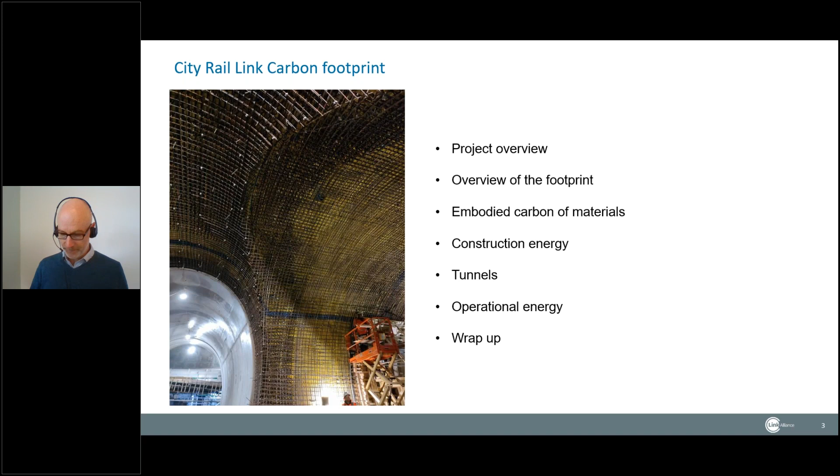This project, which was actually first proposed in the 1920s, so we've finally got around to building it. It'll be running about 100 years after it was first thought of. This project is to remove that dead end at Waitemata Station. All of this is overground rail, and it's an underground system right through the heart of the CBD, out to rejoin up with the Western Line.

It'll involve 2 new underground stations and significant redevelopment of the overground station at Maungawhau. The biggest impact it will have is that it basically doubles the capacity of the entire rail network. At the moment, all the trains have to come into Waitemata and then back out again. This will literally double the number of trains we can run, so it has a big impact on the whole network, increasing capacity equivalent to 16 lanes of motorway traffic going into the city without all the disruption that would entail.

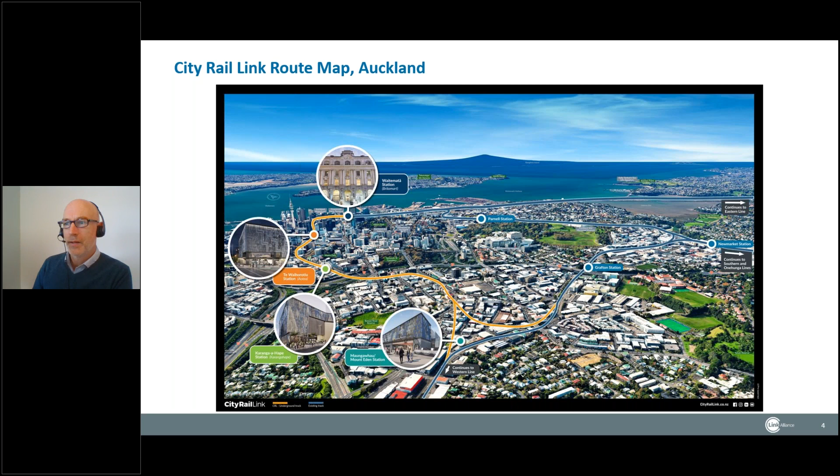So the physical build, starting at the top right here: Waitemata Station. There are some early works packages that have tunnelled underneath that station, which is an existing heritage building, using cut and cover tunnels up towards the first station, Te Waihorotiu Station. That will be the network's busiest station when it's open, a 15-metre deep cut and cover station.

From there, it's tunnel boring all the way up to Maungawhau. There are twin tunnels, 6.24 metre internal diameter. The first stop is at Karanga-a-Hape Station, a 33-metre deep mined station, then continuing on to Maungawhau Station, which is an above ground station. From there, there's a series of mined and cut and cover tunnels at the connection of this area, rising up to grade to join into the existing network. So quite significant works to join it all up.

That's the physical construction of it. The project is currently coming towards the end of the civil works, so that's mostly complete. The tunnels are all bored, and we're entering into a phase of architectural works and systems fit-outs and so on.

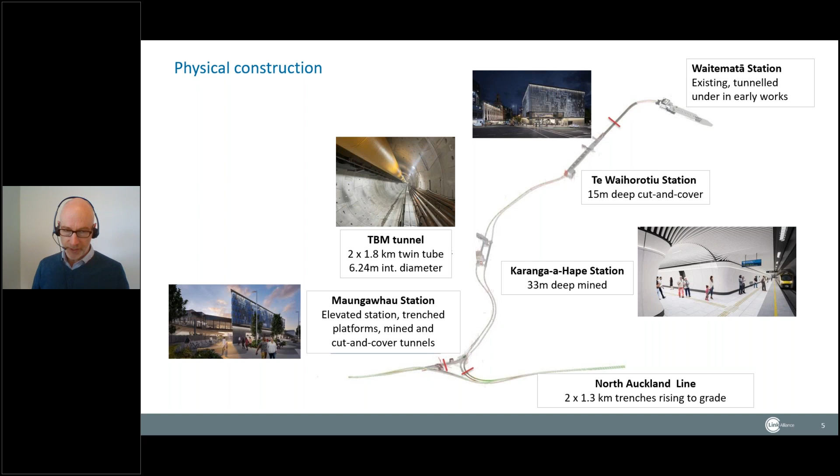It's a roughly $3.4 billion project, and the vast majority of that is delivered by the Link Alliance, this group of companies. City Rail Link Limited, which is actually my employer, is the client organisation. The design partners are AECOM, WSP, and Tonkin and Taylor, and the construction partners are Vinci, Soletanche Bachy and Downer. It's a 50-50 split between the New Zealand government—the rail assets will be owned by Kiwi Rail once completed—and Auckland Council, with assets owned by Auckland Transport when it's completed. So that's a 50-50 split in terms of funding.

The CRL carbon footprint considers construction and a projected 100 years of operation, so we've got a mandate to reduce the carbon footprint for both phases, construction and operation. As you can see from this pie chart, about half of the total footprint is the embodied carbon of the material, the carbon footprint related to manufacture and transportation of materials to actually build it.

Another 11% of the footprint is the energy used on site to build it, that's construction energy. The remaining 40% is the electricity used to operate the asset over its 100-year design life. Operational energy excludes traction power, so this is the energy used to run the stations and rail systems, but not the actual traction power of the trains.

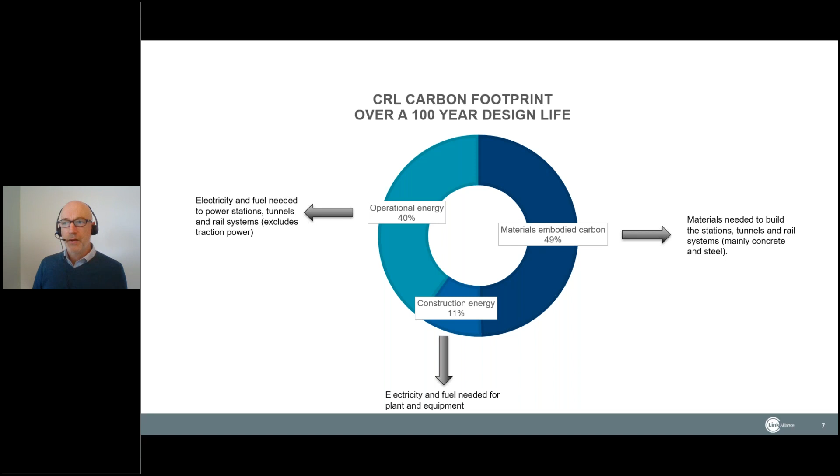I'll now hand over to Neil to talk about that first big chunk, the 50%, which is the materials carbon footprint.

Thanks, Nick. Hi everyone, I'm Neil, one of the sustainability advisors here on the City Rail Link project. If we focus a bit more on materials, we can easily see that concrete is the main source of our emissions, followed by reinforcing steel, structural steel, and cement.

To give you an idea, the carbon footprint of concrete is around 80,000 tons of CO2. This is roughly 185,000 cubic meters of concrete that's going to be poured, equivalent to about 40,000 trucks, just to give you an idea of the scale of the project.

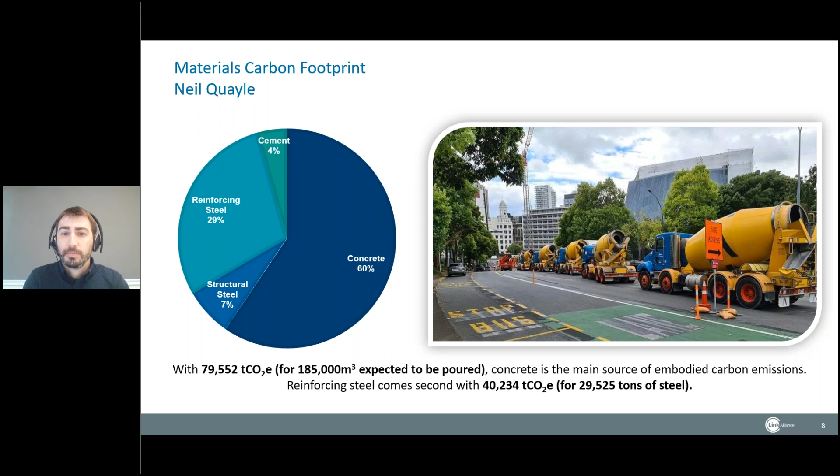So those calculations are mainly based on emission factors. We've displayed the main ones here on the chart. They come from the Infrastructure Sustainability Council, an independent rating tool based in Australia. The way to read this chart is if you take structural steel for example, on the left: to manufacture 1 ton of structural steel, we emit 2.9 tons of CO2.

So we talked about concrete, you can see here in blue in the center of the chart. What's interesting is that it's actually the cement content that drives the concrete emissions. One way to address that is to reduce the amount of cement in the concrete design. The standard 40 MPa concrete has a carbon footprint of 0.4 tons of CO2, but if you reduce its cement content, for example replacing it with fly ash, it decreases to 0.3 tons of CO2. We'll talk more about this in the slides afterwards.

The other interesting fact here is if you take timber, you've got two different values depending on the approach taken. Where you've got the negative value, it's considered as storing carbon and therefore removing some from the atmosphere. But if you take a whole of life approach, you also need to account for the disposal of the timber once you've used it on site, and therefore it has an impact and releases carbon.

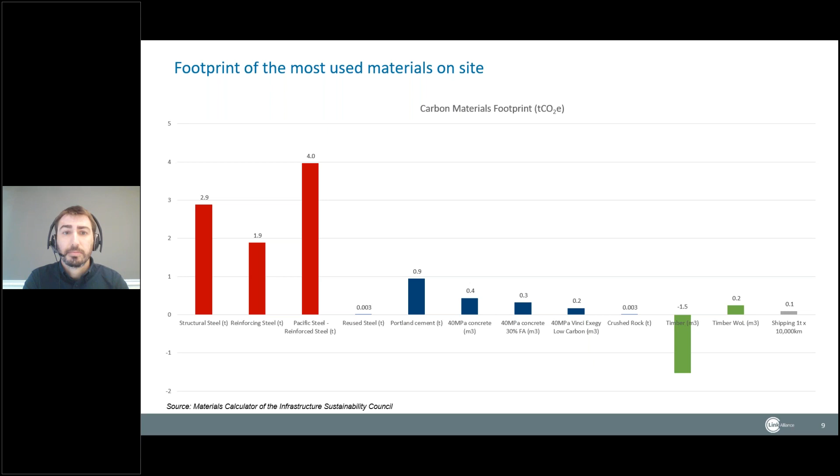So on a project of that scale, we've got different sustainability targets and KPIs. One of them is to reduce our carbon footprint by 15%. In order to do that, we need to establish a base case to have a point of comparison.

What we've done on the project is taken the reference design developed by the client. We've gone line by line, extracted the quantities, like you can see here for this particular capping beam, and then multiplied those quantities with the relevant emission factors that we just saw in the previous slide.

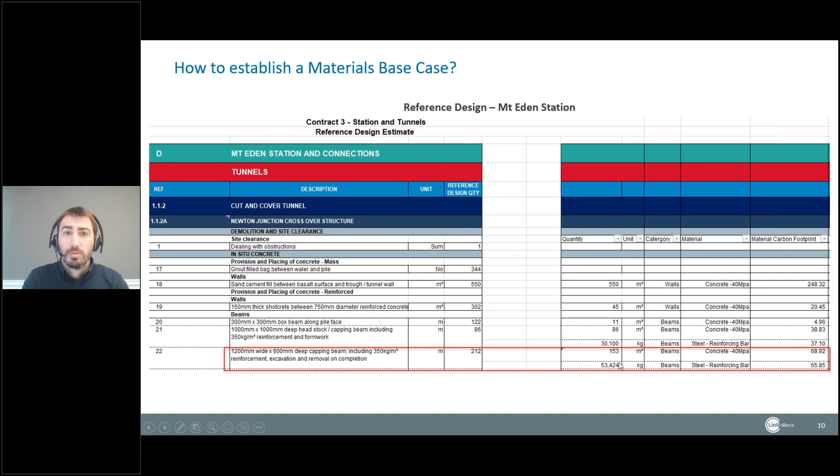Regarding design, it's a bit more complex. We first collaborated with the BIM team - BIM stands for Building Information Modeling. The team developed a 3D model of the stations and tunnels that needed to be built, and within this model they've quantified all the concrete and steel that will need to be used for the construction. Again, we've extracted those volumes and quantities and used them to create the detailed design carbon footprint.

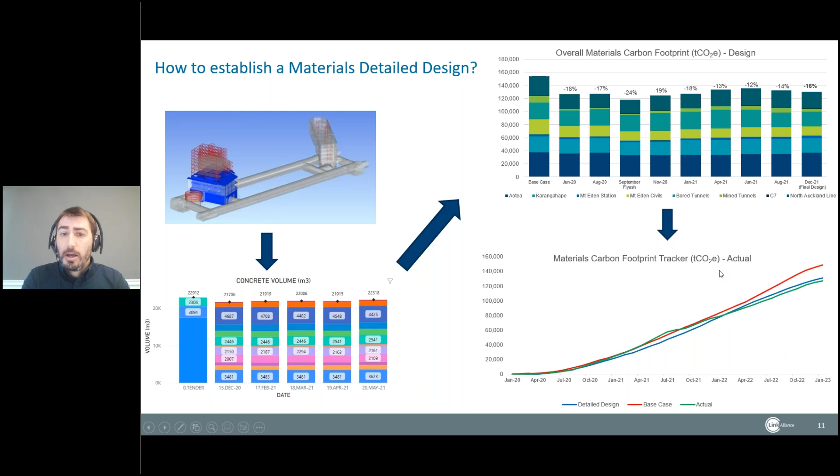Finally, the last chart uses those base case and design footprints to monitor and track against our actual footprint once construction started. The red line is our base case, the blue line is our detailed design, and the green line is our actual. You can see we're tracking at 15% below our base case, and this is due to a few different initiatives I'm going to talk about in the next slide.

So the one I've briefly mentioned is around concrete mix design. We expected an 18% reduction in our concrete footprint, mainly due to an average of 21% replacement of cement with fly ash. This might not seem like a lot if you're in another country, but here in New Zealand the current average cement replacement is only 2%. So it's quite a big jump that we have on the project.

The second one is around design optimization. As you can see on the bottom left corner, we've removed the central adit at one of our stations, which reduced the amount of tunneling required by 11%, and therefore reduced the amount of shotcrete, concrete, and reinforcing steel that was needed.

Changing in methodology, we've changed from bottom-up to top-down construction, which means we didn't need some of the temporary steel props you can see in the pictures. The only drawback was that we had to increase the thickness of some of the walls and slabs, offsetting a little of the benefits of these initiatives.

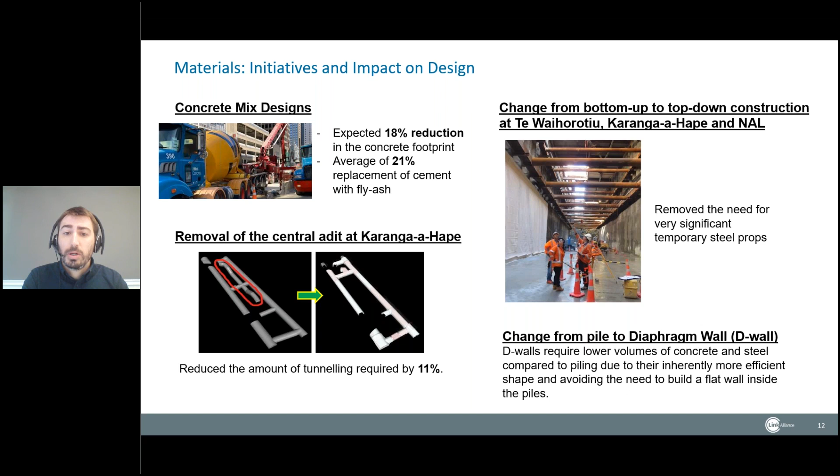And finally, we changed methodology for some of the works, from piling to D-wall. D-wall is a bit more efficient way to build some of the elements, requiring lower volumes of concrete and steel. This was a brief overview of the materials.

I'm now going to hand over back to Nick to talk about construction energy. Thank you very much.

Thanks, Neil. So as you saw from the original footprint, Neil's talked about 50% of our footprint. Construction energy is actually the smallest part, or that's kind of the most visible - you've got all those big machines on site churning out lots of diesel fumes. In fact, it's only 11% of the footprint.

So I'll talk quickly through how we calculated that. Neil mentioned that for the materials, we had a reference design with quite a detailed list of all the materials expected to be used in our baseline. The reference design doesn't have that same kind of detailed information around what will be used to construct it - that's not the sort of level of detail you get in a reference design.

So what we did in order to set a baseline we could compare ourselves against is we worked out, based on our detailed design, the constructors worked out what machines they're going to use and how long they're going to use them for, how much diesel they're going to use, etc. We also had a whole lot of initiatives that we implemented to try and reduce the carbon footprint of all of that.

So what we did is we looked at our footprint for our detailed design, worked out what the initiatives were expected to save, and used it to backcast to a baseline we can measure against. So a baseline is basically a detailed design without the initiatives we've added in - it's a design using business-as-usual technologies, with no focus on reducing the carbon footprint.

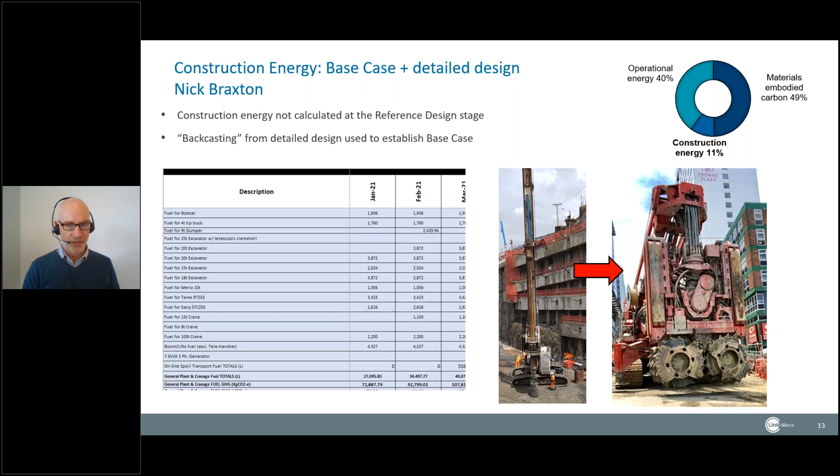For example, a lot of the original design had a lot of piling with secant and contiguous piles, etc. We replaced quite a lot of that work with diaphragm walls, so we worked out whether that saved us any on-site emissions, and put that into our savings. I'll talk through some of the details of where we got those savings.

We're expecting a 19% reduction in our construction emissions carbon footprint, which comes from 5 main areas. First, as I mentioned, we changed a lot of the piling methodology, from piles to D-walls, and made other changes to the piling approach, doing more detailed site investigations so we could optimize the piles we're using, changing from secant piles to contiguous piles in various areas - all sorts of different changes, even keeping an existing wall originally slated for demolition that we found we could reuse.

So a whole lot of things there have created quite big savings in piling, which is a very big part of the construction footprint. Another thing we've done is, where possible, we've tried to use grid electricity. New Zealand's grid is about 80 to 85% renewable energy, mainly from hydro, geothermal and wind. So anytime you switch from using a diesel powered machine to a grid connected machine, you get about an 80-85% saving in your carbon footprint. So that's the single biggest thing we can do.

A good example of that is these multi-service vehicles, used in the bored tunneling. They deliver the segments to the tunnel boring machine, and people and other equipment. We used electric MSVs - we actually had 5 MSVs, 2 were diesel, 3 were electric. The electric ones were battery electric with regenerative braking. The advantage of our project is that it's all downhill, so the MSVs are traveling downhill loaded and therefore recharging the battery, then go uphill empty.

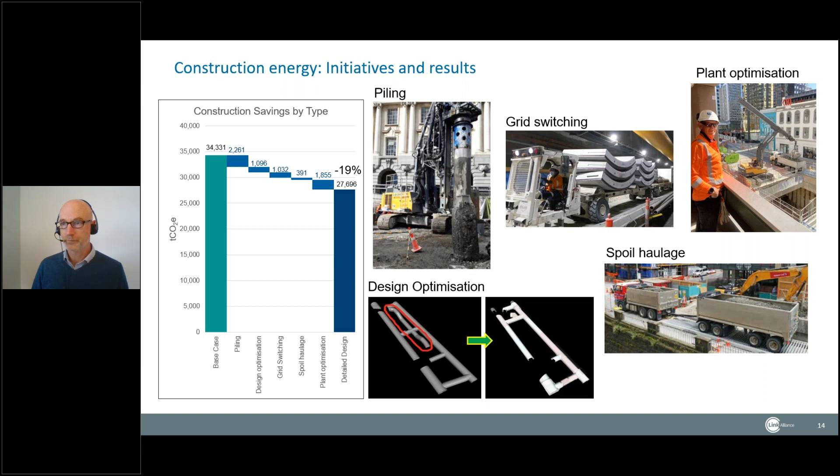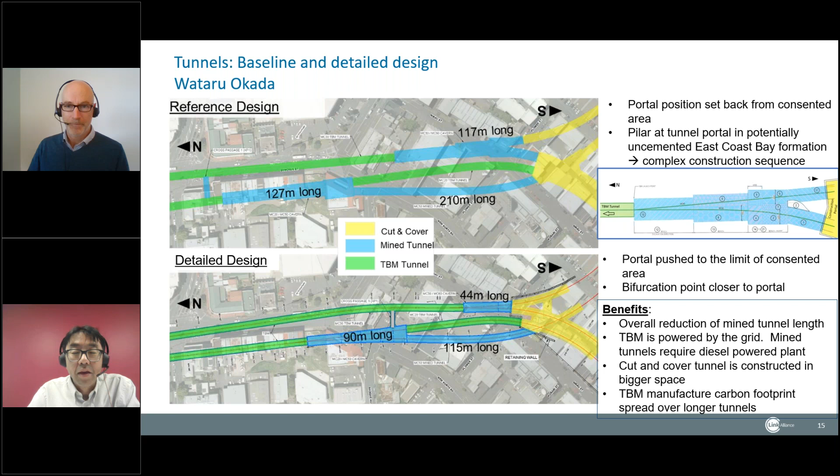I'm now going to hand over to Wataru, who will talk about some of the work we've done on the mined tunnels in particular. Yeah, thanks, Nick. So my name is Wataru, I'm the tunnel discipline lead on this project.

So we're going to spend a bit of time looking at design optimization in the tunnel design space. The sketch at the top is the reference design, provided by the council for the tenderers who were bidding for the detailed design and delivery of the job. And the figure at the bottom is the detailed design which we developed during the delivery phase.

So the key thing to note is that we substantially reduced the blue section of the tunnel, which is the mined tunnel. The big advantage in doing that is mined tunnel is relatively carbon heavy because we need to use a lot of shotcrete as a temporary support, and we also need to come back and build a permanent lining with in-situ concrete. So what we did right at the start is to move the yellow cut and cover section to the left, so that we can reduce mined tunnel and some of the TBM tunnel.

In the cut and cover tunnel, we have more space for construction plant to operate, so we have more efficiency in terms of construction energy footprint, and that way we were able to substantially reduce mined tunnel.

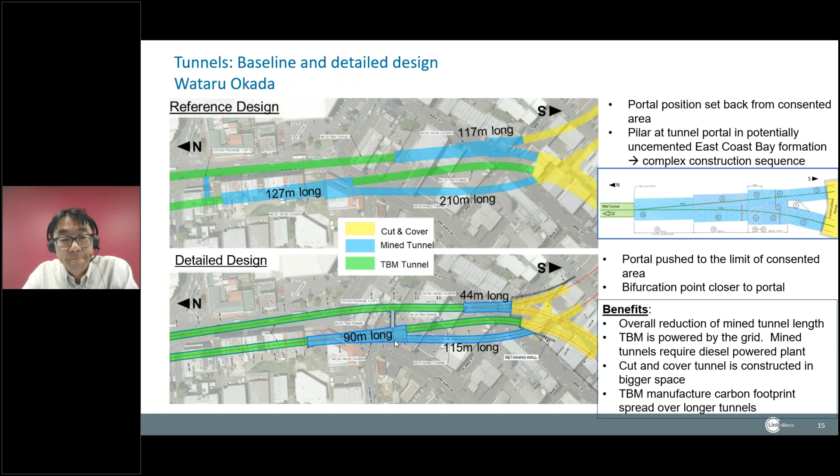We also looked at geometric optimization of the mined cavern, where we have the rail Y junction. The reference design was made up of a series of constant profile step changes. In the detailed design, we looked at a tapered geometry instead. This involves a slightly more complex construction methodology and special formwork, but our construction team had expertise in this area. The net result was that we substantially reduced the volume of excavation and concrete lining, and it also helps with ventilation and airflow, which reduces the operational energy aspect as well.

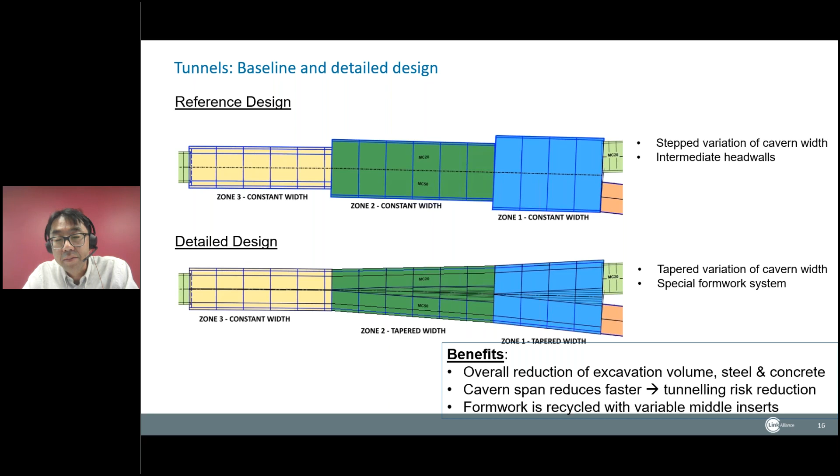We did use custom-made formwork, but we made it in such a way that it can be recycled for every single pour, so that we minimize waste in that space. Next slide, please.

So we looked at volume optimization, but we also looked at alternative materials which give us savings in carbon footprint. In New Zealand, traditionally we've been using steel fiber reinforced shotcrete for tunneling work, and that was what was specified in the reference design. But in our case, we looked at an alternative material involving polypropylene fiber reinforcement in the shotcrete. This was done on an overseas project, and our construction team had some experience using this material, so we did a little bit of testing before introducing it to site. This resulted in a carbon footprint reduction in terms of embodied carbon, and because of the larger volume, it gave us quite a bit of saving as well.

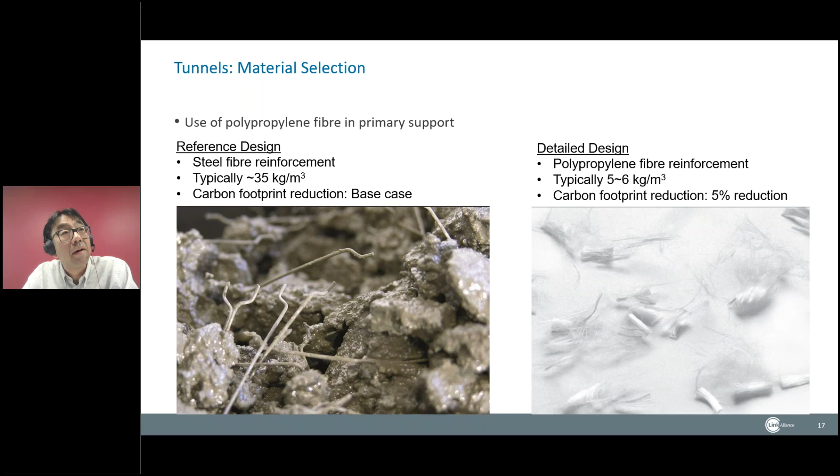I'm going to hand over to Andrew Lester, who will tell us a bit more about operational energy.

Morning everyone, my name's Andrew Lester. I'm a principal mechanical engineer here at WSP in Auckland, Tamaki Makaurau, and on this project I'm the mechanical, fire and hydraulics lead. My involvement with the sustainability team has been to assess the operational energy of the stations. We build these things, it takes quite a lot of carbon to set them in place, but then we also have to run them, and our footprint takes into account 100 years worth of that. One thing to note is that operational energy often tends to be a fairly large chunk of the footprint over the life of the project.

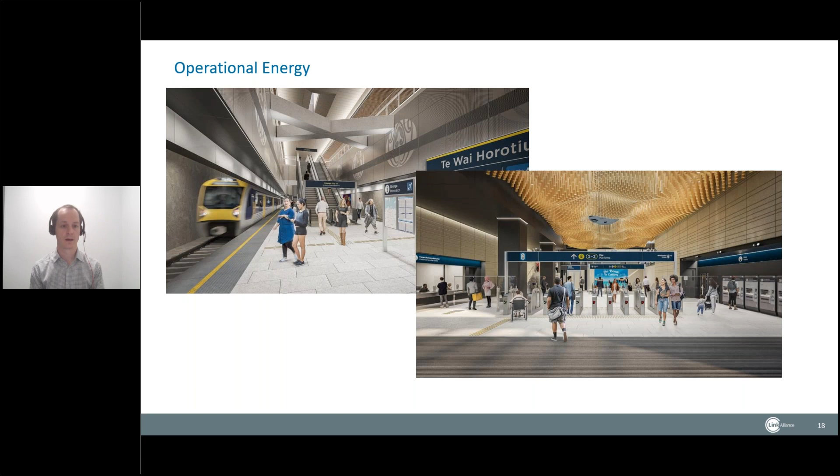With these being fully electric stations, there's no gas, no combusted fuels on site. And with the New Zealand grid being as clean as it is, we tend to have a smaller footprint than we might otherwise for the operational energy part of the cycle. Nick, if you can go to the next slide, please, we'll step through some of those benefits.

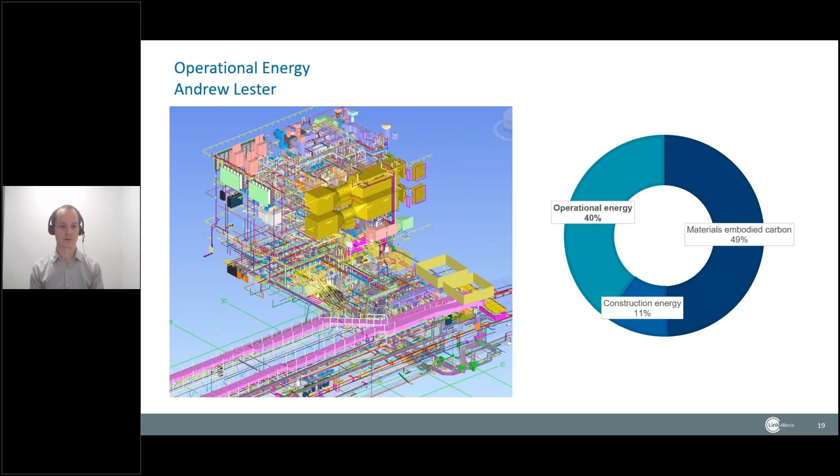Looking again at that 40%, it's made up of 40% carbon, not necessarily energy, so that's the carbon footprint component related to the relatively clean New Zealand grid. What you can see on the left is an extract of the BIM model with all of the structure and architecture stripped away, giving you a view of all the services that run around inside these buildings, hidden behind the concrete and the steel. In particular, you can see the big tunnel vent fans there in the greenish yellow color. Those are a pretty big contributor to the operational energy, and we'll talk a bit more about those in just a moment. Thanks, Nick.

Similar to the construction energy, we had to do a backcast on our base case. The reference design was a very preliminary design, and it didn't really give us much to work from in terms of operational energy. Another point to note is that the minimum requirements we're working to on this project incorporate quite a lot of energy saving initiatives. So we were compelled to use some of those as part of the project, but which would not be part of business as usual.

The other thing that did happen on this project was a switch from 6-car train sets to 9-car train sets as the design basis partway through. Here in Auckland, we run 3-car and 6-car multiple units currently, but in the future we're looking to run 9-car multiple units, that's 9 train carriages in a row. In order to do that, the stations had to get bigger. They had to have different ventilation needs, different cooling needs. So if we'd stuck with the pure reference design, it would not have been a very good representation of what we've ended up having to design for.

In terms of our basis of decision-making along the way, we've compared it to a business as usual design and construct contract, harking back to the fact that where those energy saving initiatives were baked into the reference design, those aren't necessarily considered as part of the backcast. We've applied conservatism, trying generally with our operational energy to be a bit on the conservative side rather than being too keen with points we might not seriously expect people to achieve. We've also taken the view that we could reasonably expect some low cost or standard energy efficiency measures to be present.

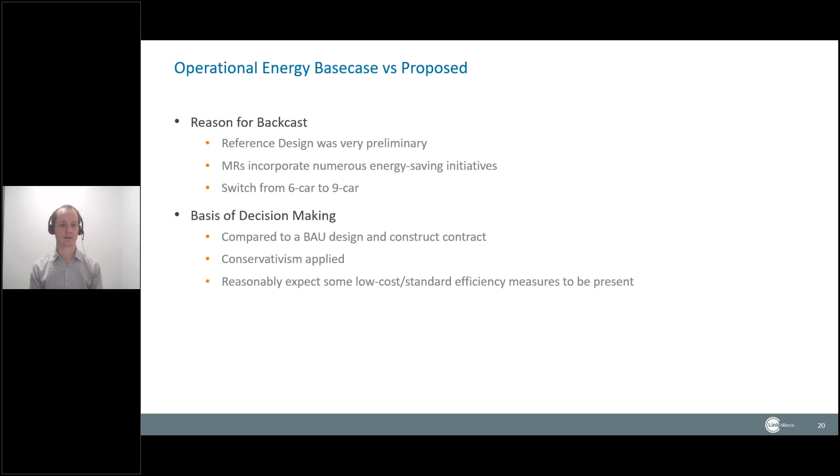Looking at some of the key operational energy benefits we took advantage of within tunnel ventilation, those big fans I pointed out earlier, we moved our operational energy strategy from a basic stepwise control, which is what was proposed at the beginning of the project and was more or less seasonally driven, to a temperature-based control. So at the beginning of a season we'd turn them on to say 50% and run them, then 100%, versus now we've implemented temperature sensors in the stations allowing more efficient operation. It runs less of the time, and given they're such big fans, around 350-400 kilowatt fans, it takes a lot of power to run them, so it's good to reduce how much they operate.

Within the mechanical engineering package, we've made use of EC fans, a higher efficiency fan type than regular AC fans. We've used higher efficiency chillers, trying to use the most efficient chillers we can that fit our other needs, including packaging and constraints around where they're allowed to sit within the stations. We've also increased operational temperatures in some rooms where acceptable, since some rooms have equipment that's already ruggedized, so we can run those at a higher temperature, reducing their cooling burden.

With the escalators, we've got high efficiency drives, and we're using an improved optimal control system from the escalator manufacturer that allows them to run at lower speed more of the time and use less energy.

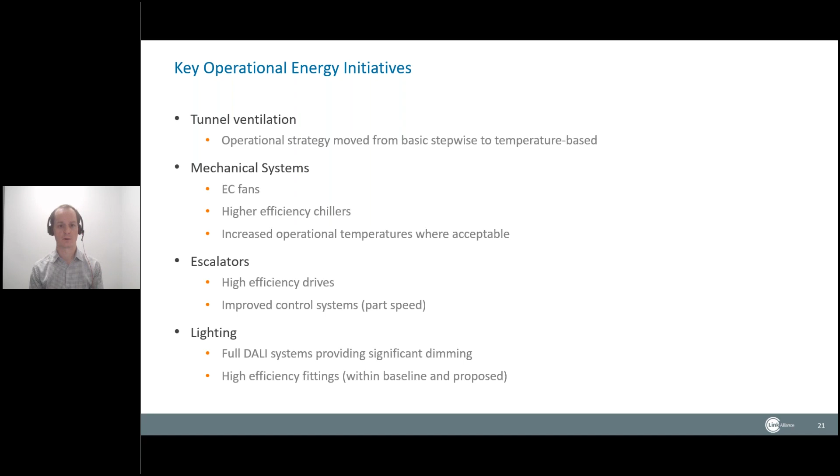Okay, so just looking at the detail on some of these operational energy results, we've got our backcast baseline on the left there, and then stepping through each of those initiatives that I spoke about.

In our case, the energy reducing escalator controls were not a huge benefit, and part of the reason for that compared to some metro systems is that our escalators are not all that heavily loaded, especially in our early phases. Our escalators are designed to handle the throughput of a fully busy station 100 years from now with 9-car train sets running through it. So lots of people coming through the stations means a few more escalators had to be built into the design, and we get a little less benefit out of them on day one than we otherwise would.

DALI dimming was a big step for us. It has allowed us to take advantage of turning down quite a lot of those lights in quite a lot of areas, as well as reliably ensuring that they're turned off in areas where they're not required when they're not required.

Temperature-based control of the tunnel ventilation fans is a really big step change for us in terms of the amount of power we were able to avoid using with those fans. That was probably one of the single biggest changes we were able to make, and a relatively easy one to implement once we got over the initial resistance from the construction team on that one, but that was all good.

Then the high efficiency mechanical plant - not any one of those savings is massive, but the incremental savings of having quite a lot of small changes still added up to a fair amount. So I would recommend people think about that as well: each individual change might not be that big, but if you can glom together quite a few of those small changes, it can add up to a reasonable saving.

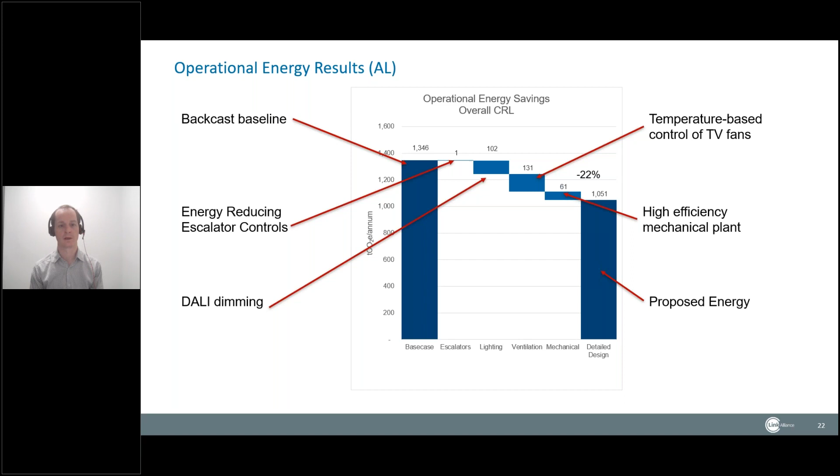And then that takes us down to a proposed energy on the right-hand side, which is at the time of this estimate about 22% lower than our initial backcast baseline. We can go to the next slide there, Nick.